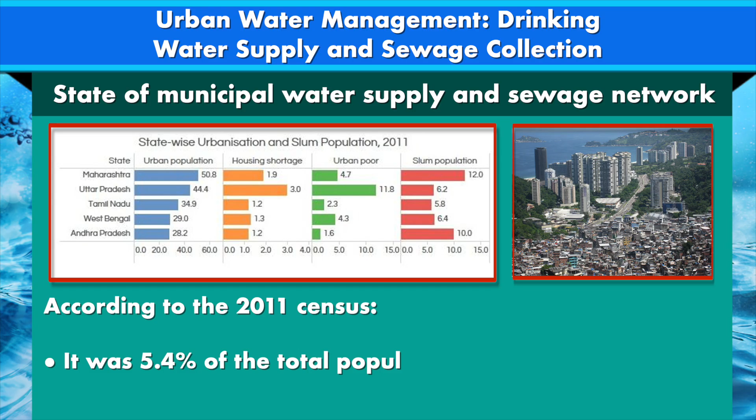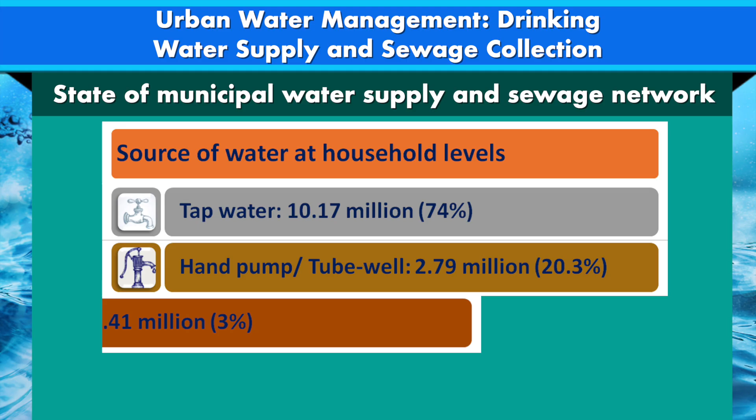sanitation. According to the 2011 census, 65.5 million Indians from 13.9 million households lived in the slums. It was 5.4% of the total population and 17.4% of the urban population. Among them, 74% of households had access to tap water, 20.3% fetched water from hand pumps or tube wells, and 3% sourced water from dug wells.

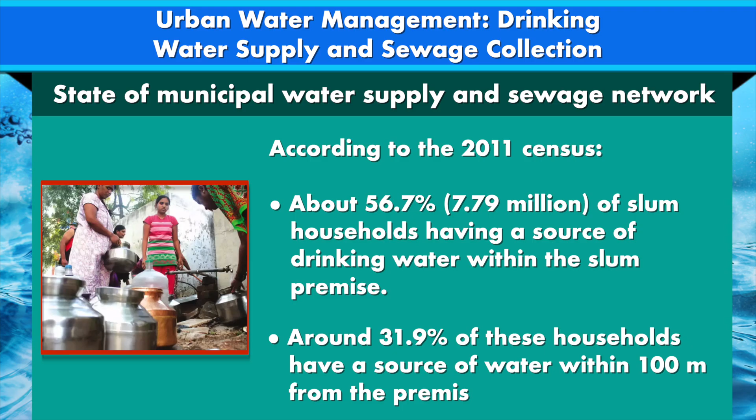Interestingly, 56.7% of slum households have a source of drinking water within the slum premises. Around 31.9% of these households have a source of water within 100 meters from the premises. In 2011, only 66% of urban slum households had a toilet facility within the premises, whereas the rest used public facilities or defecated in the open.

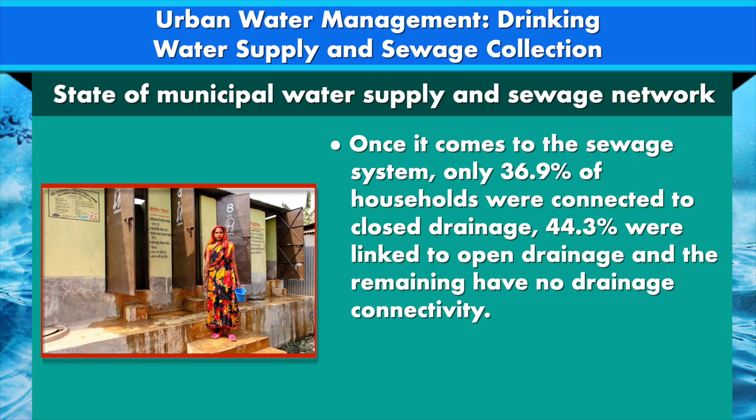When it comes to the sewage system, only 36.9% of households were connected to closed drainage, 44.3% were linked to open drainage, and the remaining had no drainage connectivity. According to the World Bank, in 2018, 35.2% of the urban population lived in slums. Having access to water in the premises is one issue. The bigger issue is the quality of drinking water.

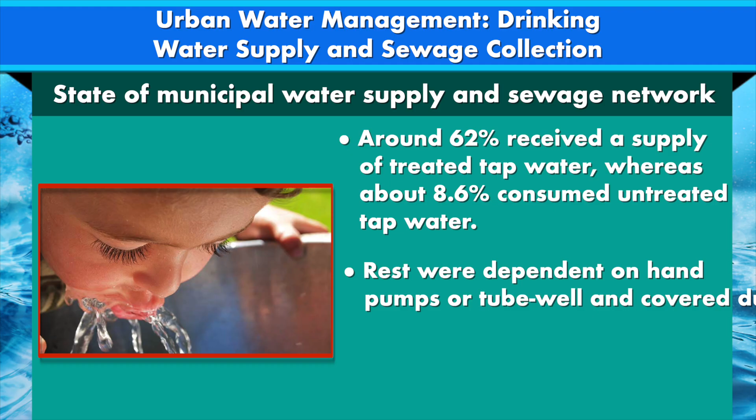While in 2001, 68.7% of households in India had access to safe drinking water, in 2011 it increased to 70.6%. According to the census of 2011, around 89% of India's urban households had access to an improved source of drinking water. Around 62% received a supply of treated tap water, whereas 8.6% consumed untreated tap water. The rest were dependent on hand pumps, tube wells or covered dug wells for day-to-day requirements.

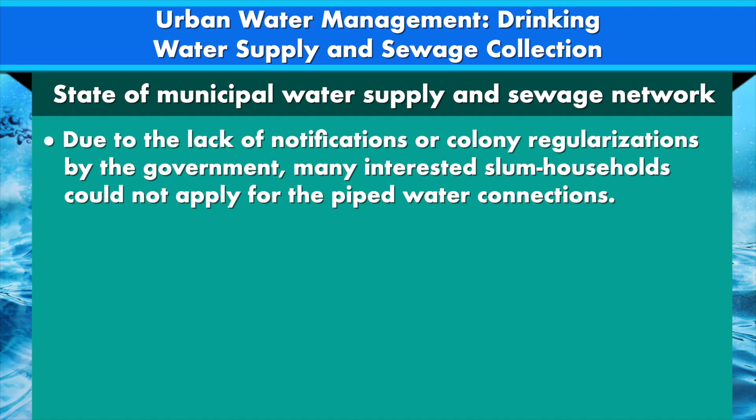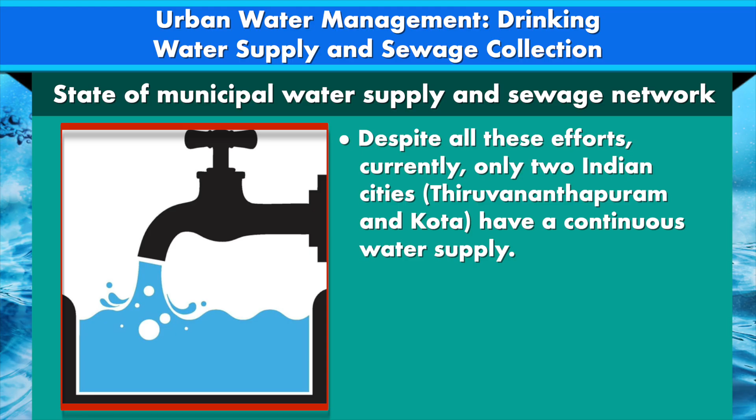As of 2019, 92.7% of Indian households had access to primary water sources, whereas 99.3% had access to basic sanitation. Census 2011 data suggests that due to community level connections, slum households have better access to tap water than the non-slum population. Due to the lack of notification or regularization by the governments, many interested slum households could not apply for piped water connection. Despite all these efforts, currently only two Indian cities, Trivandrum and Kota, have a continuous water supply. Let us deliberate on the initiatives for improving the urban infrastructure in the water supply sector and sanitation.

Since 2014, the current government has taken several initiatives to improve the supply and quality of drinking water and sanitation coverage both in rural and urban areas. Some of these schemes brought a sea change in coverage and attitude of people. Taking a defining step, the Swachh Bharat Mission Urban was launched on October 2, 2014, with an aim of making urban India free from open defecation and achieving 100% scientific management of municipal solid waste in over 4,000 statutory towns in the country. Under this mission, in the last 5 years, 62.3 lakh household level toilets and 5.95 lakh community and public toilets were constructed to improve the sanitation facilities.

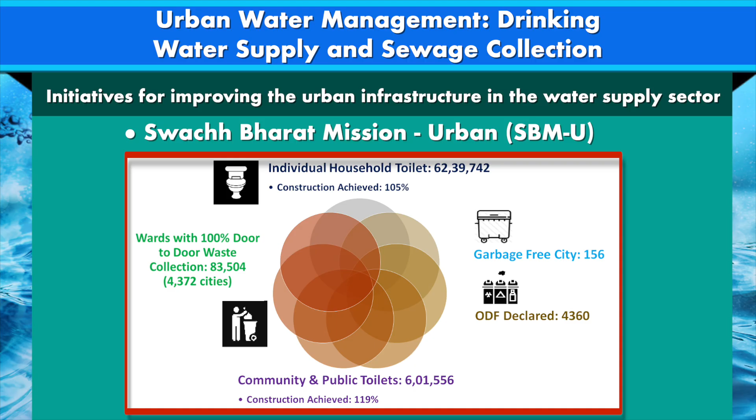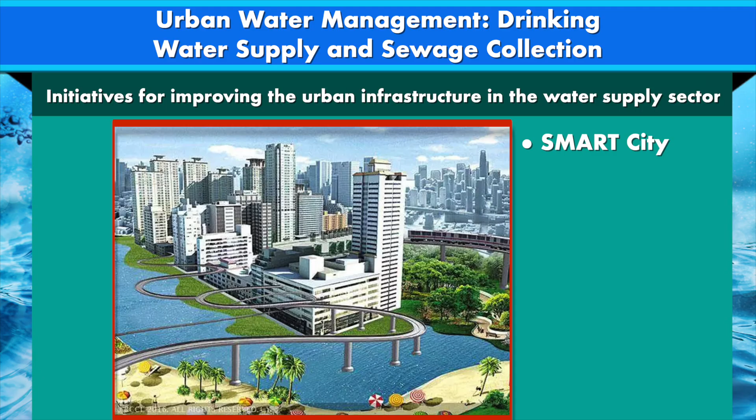Another initiative in this direction is Smart City. The objective of this scheme is to promote sustainable and inclusive cities that provide core infrastructure including adequate water and sanitation, and offer a decent quality of life to its citizens, a sustainable, clean environment and application of smart solutions.

Atal Mission for Rejuvenation and Urban Transformation, or AMRUT, is aimed to provide basic services such as water supply, sewage and urban transport to households and build amenities in the cities which will improve the quality of life for all, particularly the poor and disadvantaged. Through this scheme, the government wants to ensure that every urban household has access to a tap with assured supply of potable water and a sewage connection.

Whereas the Swachh Survekshan scheme is aimed to inculcate competition among urban areas for enhancing the performance of cities on sanitation and cleanliness. The National Policy on Faecal Sludge and Septage Management is aimed to set the context, priorities and direction for, and to facilitate, nationwide implementation of these services in urban local bodies for ensuring safe and sustainable sanitation for every household, street, town and city.

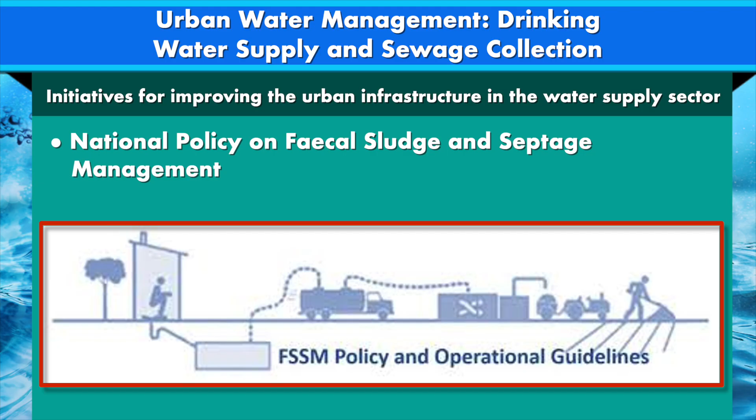Jal Jeevan Mission is another key initiative. By year 2019, only 30.1 million out of 190 million rural and peri-urban households had access to tap water. Therefore, a key focus of this socially inclusive mission is Har Ghar Nal Se Jal initiative, under which piped drinking water will be supplied to almost 160 million rural and peripheral households in India by year 2024.

Government has earmarked 3.5 trillion rupees for Jal Jeevan Mission. This program also aims to implement source sustainability measures as mandatory elements, such as recharge and reuse through grey water management, water conservation, rainwater harvesting.

Despite all these efforts, the water supply and sanitation network in India faces several challenges. Having an illegal and unmetered connection is a common practice in all parts and slum areas of most of the Indian cities. Besides, due to the lack of pressure, insufficient and irregular supplies, it is a common practice to use pumps. Use of too many pumps during non-supply hours creates a vacuum in the pipelines.

It results in breakage of the supply pipe, and dirty water from nearby sewage pipes may seep through and contaminate the entire supply. Over half of the cost of municipal water supply goes into creating and maintaining the municipal water distribution network. Damaging of the pipelines during construction activities and road widening and repairs is also a frequent issue in India.

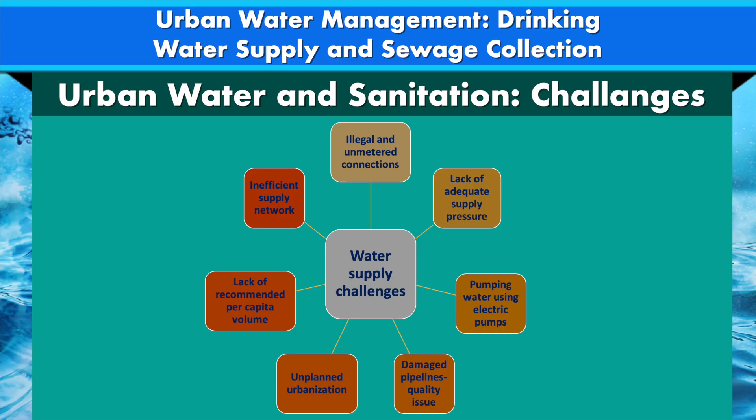In most cases, the cost of household municipal water supply in India is too low to recover the cost, and even urban local bodies find it hard to recover the transportation and treatment cost. It not only limits the capacity of urban local bodies in investing in infrastructure construction, but also promotes misuse of water. Let's summarize this lecture.

One of the key concerns in the urban areas is the growing gap between demand and supply of basic services. Particularly, the gap between demand and supply of drinking water and sanitation facilities is growing. Despite all previous efforts, these gaps further widened. Goal of health for all cannot be achieved without ensuring drinking water supply and sanitation facilities.

The government is committed to provide drinking water to every settlement in the country within the next 5 years. The government has also decided to go all out to achieve the goal of expansion and improvement of sanitation facilities along with other social infrastructure. With current mission mode initiatives and consistent efforts, it might be possible to bridge the gap in access and services in the next 5 to 10 years.

The goal of uninterrupted piped water in the cities is a big challenge due to high infrastructure investment needs and depleting water resources. The situation is exacerbated by a rapid increase of population, unwise use of water resources, and an alarming rise in pollution levels in surface water bodies and in groundwater.

Besides, municipal water supply quality and volume vary greatly depending upon the availability of water resources, the tax base of municipal bodies, support from state and central governments, and pricing and extent of payment by the users.

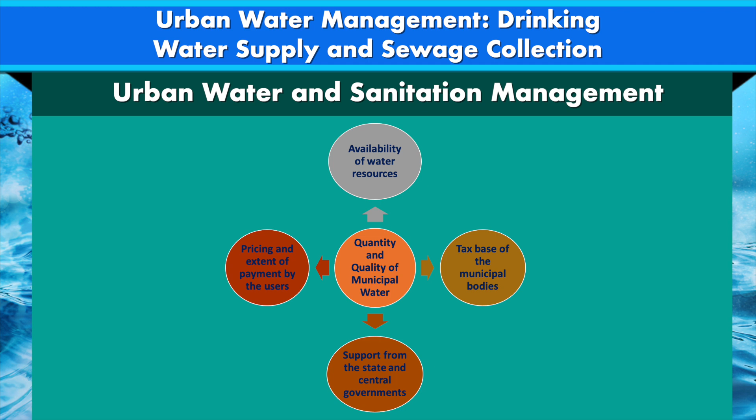Therefore, the policy responses need to provide for improved public health outcomes via universal access and improved service quality while facing the challenge of increasingly severe water and resource constraints on one hand and limited institutional and financial capacities on the other hand. I hope that this lecture provided you an insight into the various aspects of municipal water supply and sanitation.